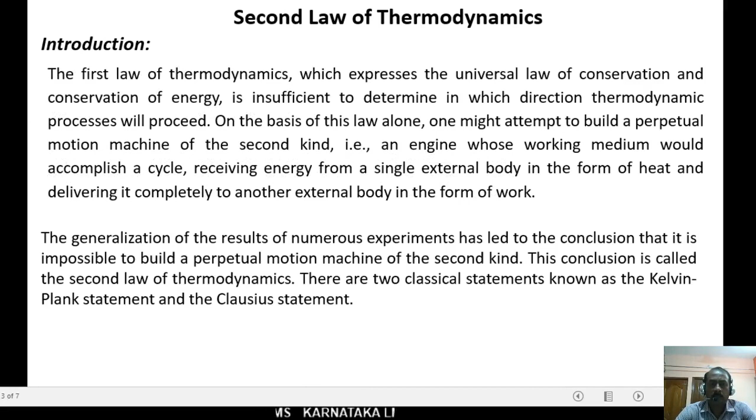The generalization of the results of numerous experiments has led to the conclusion that it is impossible to build a perpetual motion machine of the second kind. This conclusion is called the second law of thermodynamics. There are two classical statements known as the Kelvin-Planck statement, and the second one is the Clausius statement.

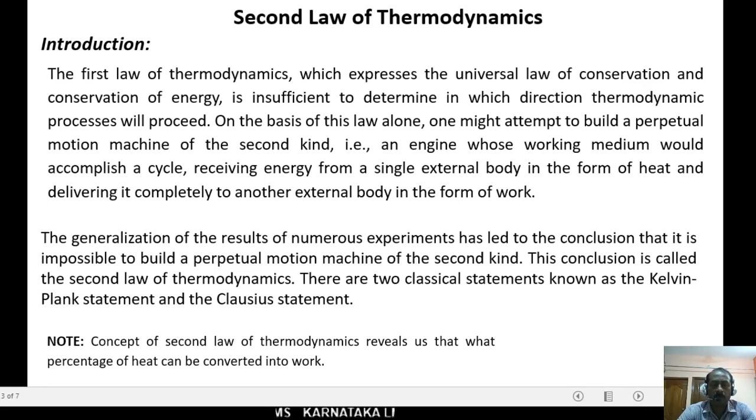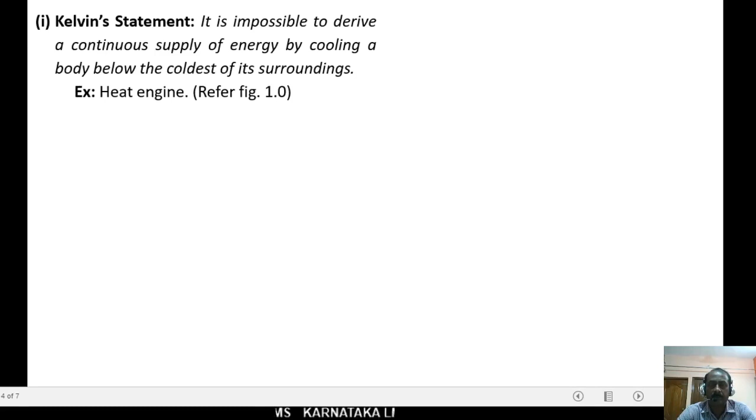Dear students, the second law of thermodynamics reveals to us what percentage of heat can be converted into work. Let us see the statements. First one, Kelvin's statement. It is impossible to derive a continuous supply of energy by cooling a body below the coldest of its surroundings. I repeat, it states that it is impossible to derive a continuous supply of energy by cooling a body below the coldest of its surroundings.

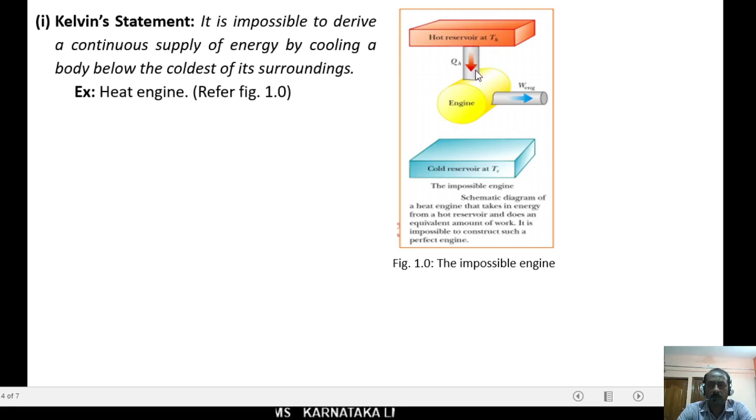Just refer to the figure here, that is the impossible engine. This is the heat engine. Here this is the hot reservoir which is at temperature Th. This is the cold reservoir which is maintained at temperature Tc. This is the diagram of a heat engine that takes in energy from a hot reservoir and does an equivalent amount of work. It is impossible to construct such a perfect engine.

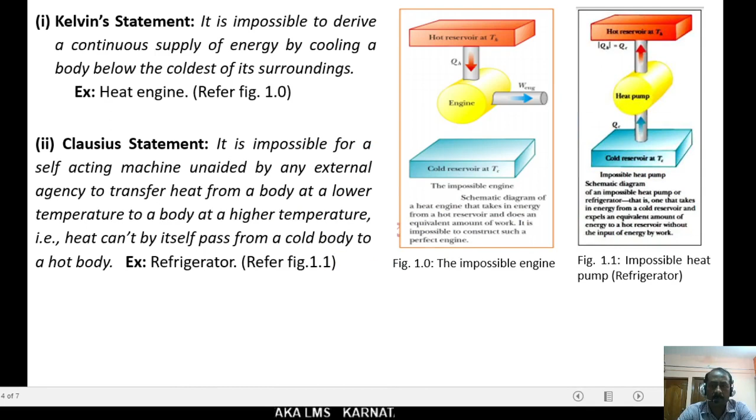Second statement, that is the Clausius statement. It states that it is impossible for a self-acting machine, unaided by any external agency, to transfer heat from a body at a lower temperature to a body at a higher temperature. That is, heat cannot by itself pass from a cold body to a hot body. An example for this one is the refrigerator.

See the second diagram here. This is the schematic diagram of a refrigerator, that means an impossible heat pump. The first diagram is the impossible engine. This one is the impossible heat pump. It consists of a hot reservoir, that is Th, and a cold reservoir Tc.

This is the schematic diagram of an impossible heat pump or refrigerator, that is one that takes in energy from a cold reservoir and expels an equivalent amount of energy to a hot reservoir without the input of energy by work. This is about the Clausius statement with an example of a refrigerator.

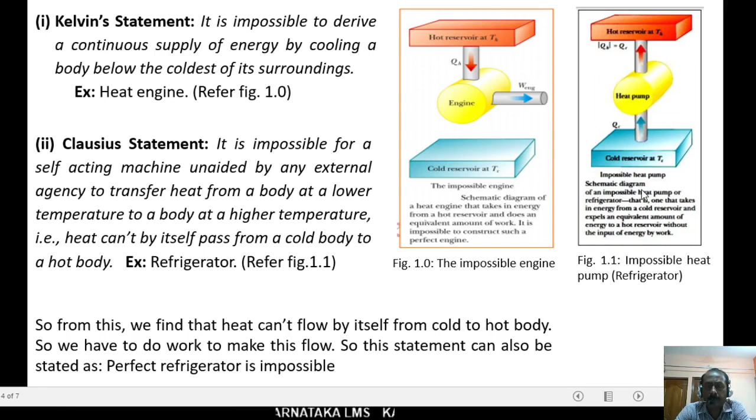So, from this we find that heat cannot flow by itself from a cold to a hot body. So we have to do work to make this flow. So this statement can also be stated as: a perfect refrigerator is impossible.

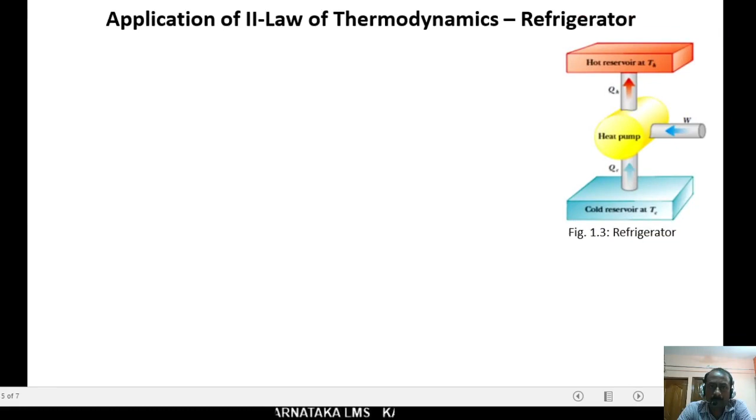Let us see the application of the second law of thermodynamics. It is the refrigerator. A heat engine run in reverse is known as a refrigerator. A refrigerator needs work to transfer heat from a cold body to a hot body.

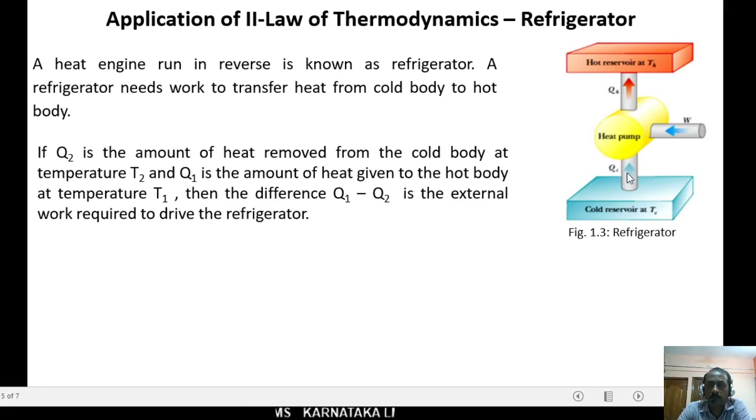If Q2 is the amount of heat removed from the cold body at the temperature T2 and Q1 is the amount of heat given to the hot body at a temperature T1, then the difference of heat energy, Q1 minus Q2, is the external work required to drive the refrigerator.

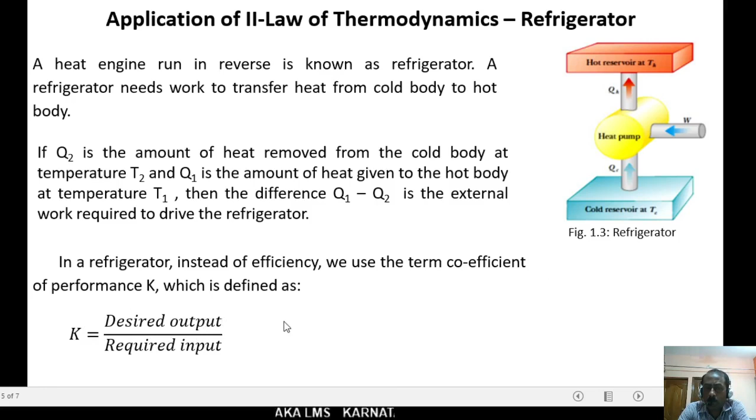In a refrigerator, instead of efficiency, we use the term coefficient of performance, that is K, which is defined as the ratio of desired output to the required input. Therefore, coefficient of performance is the ratio of heat removed from the cold body to the mechanical work required to operate the refrigerator.

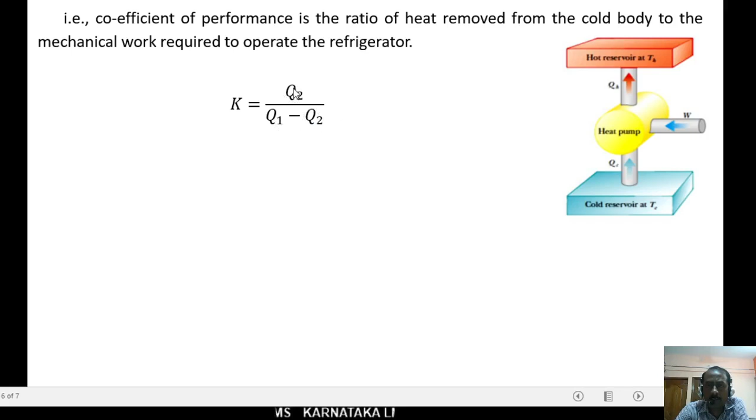That is, K equals Q2 upon Q1 minus Q2. Q2 is the heat removed from the cold body. Q1 minus Q2 is the work required to operate the refrigerator. In a perfect refrigerator, work done is equal to 0 and Q2 equals Q1. So, the coefficient of performance of a perfect refrigerator is infinite.

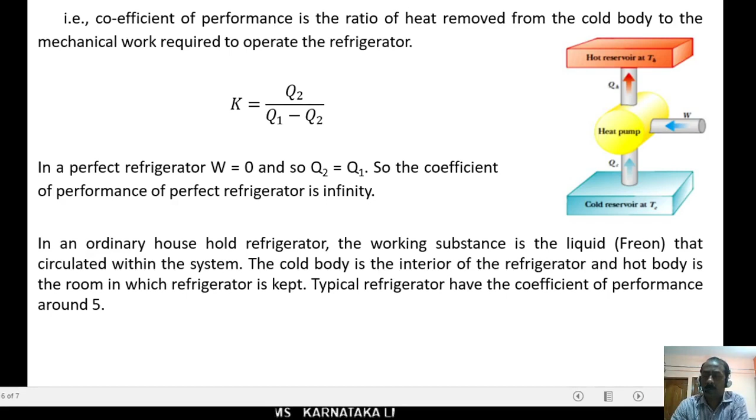In an ordinary household refrigerator, the working substance is the liquid freon that circulates within the system. The cold body is the interior of the refrigerator and the hot body is the room in which the refrigerator is kept. A typical refrigerator has a coefficient of performance of around 5. This is about the second law of thermodynamics and its applications.